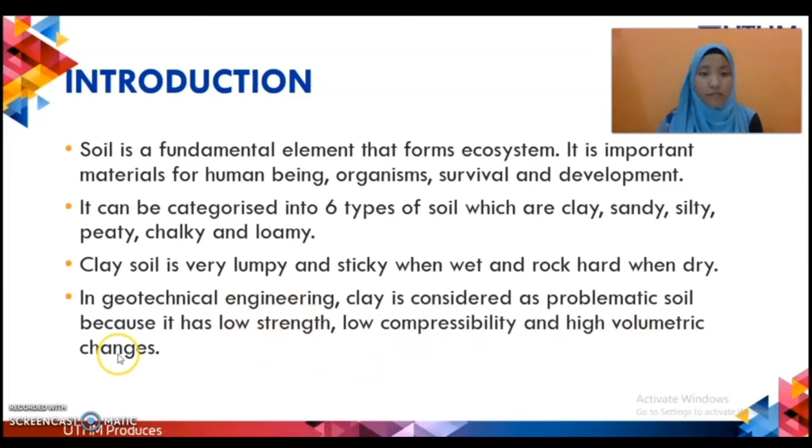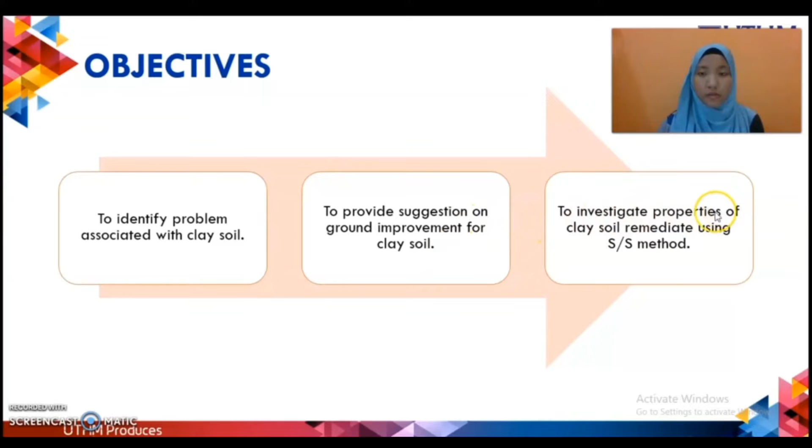Next, the objectives. The first is to identify problems associated with clay soil. The second is to provide suggestions on ground improvement for clay soil. And the last is to investigate properties of clay soil, remediated using the SS method.

Next, the problem statement, meaning what problems we want to address in this study. The first is what characteristics influence clay as a problematic soil. The second is what binder is used to remediate clay soil. The third is what properties of clay soil we focus on in this review. And the last is what properties of clay soil result when adding fly ash and OPC as a binder.

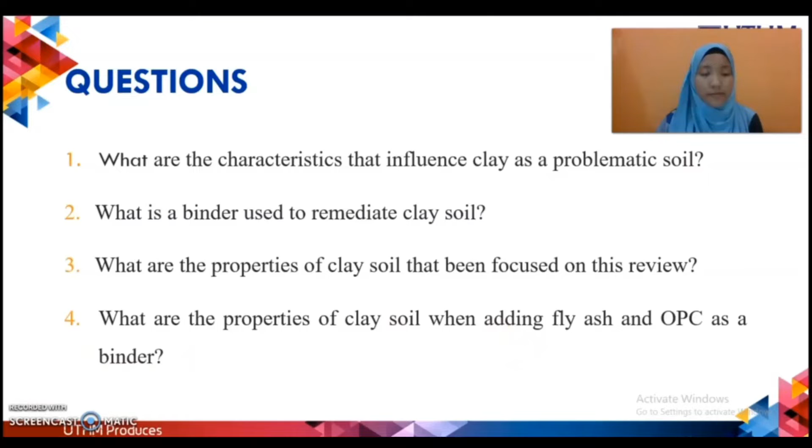Hypothesis: Clay soil is known as a problematic soil because one of its negative properties is low permeability, which causes large water holding capacity. So the amount of water is higher in clay. Based on this property, it clearly shows that clay is a problematic soil that needs to be improved, because when the amount of water is higher in clay, it will affect the strength of clay.

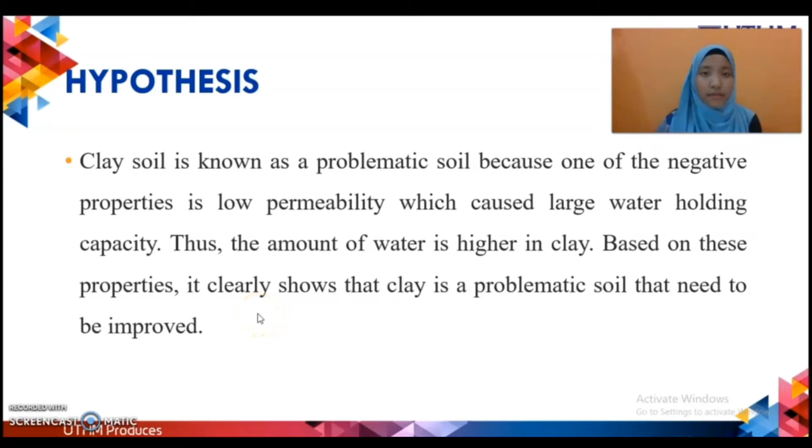Last but not least is the importance of the study. We need to study this because it can contribute knowledge about problematic soil, which is clay. We can also learn about the properties of clay soil, such as the Atterberg limit test, CBR test, and UCS test. These three are the main properties we focus on in this review.

The next point is suggestions on binders to improve clay strength, for example fly ash and also cement (OPC).

In civil engineering, it is important to investigate and study the condition of soil, because every building or structure built on the ground has to have a foundation. If the foundation is not stable due to weak or problematic soil, it might lead to damage in the future, whether to the structure itself or to people's safety.

That's all from me. The rest of the presentation will be continued by our group member.

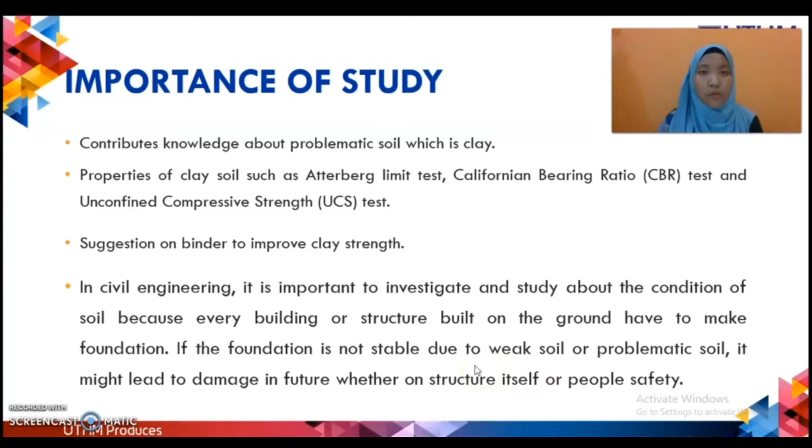First, soil strength. When examining soil behavior, soil strength is an important element to consider. The findings from sample sites and the procedure used to determine the physical qualities of the soil might be altered because these values are extremely difficult to quantify in the field.

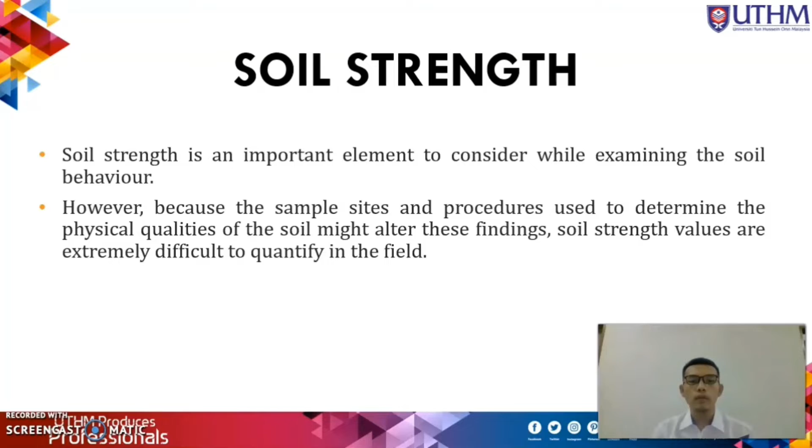Second, clay soil. Clay soil is nutrient dense and highly plastic soil that has varying firmness depending on moisture content level. It also has a fine texture and is impermeable, trapping water. The particles of clay are packed tightly at the structural level due to their tiny size. As a result, it becomes difficult for water to pass through because of the little space between particles. When clay soil is in wet condition, it has high moisture content, making it sticky and smooth to feel. When the moisture level is low, it becomes brittle and loses its plasticity qualities.

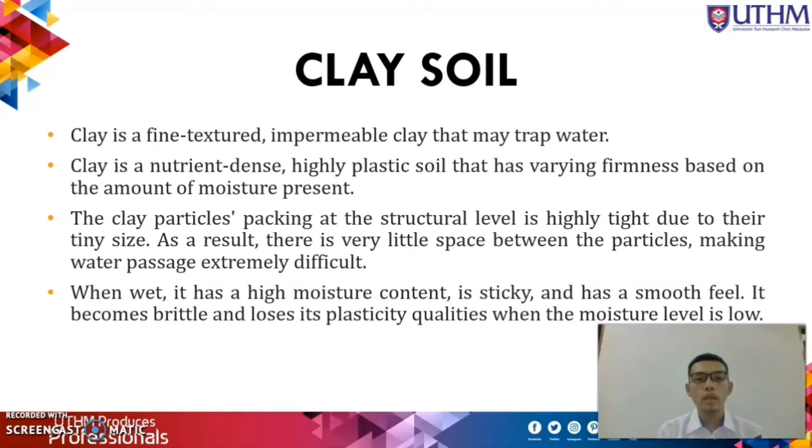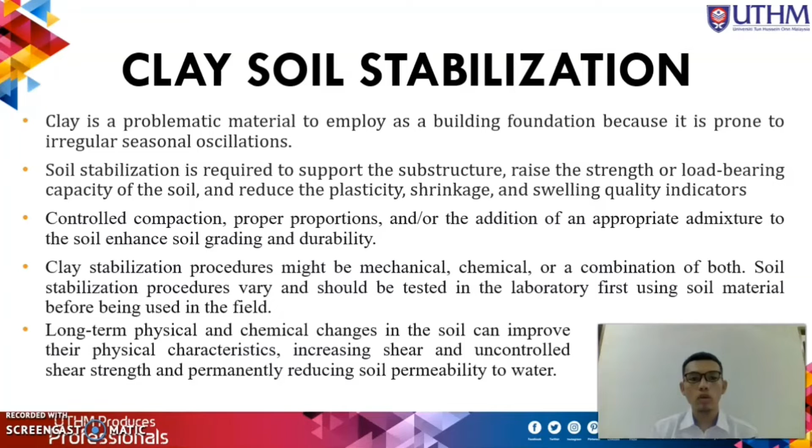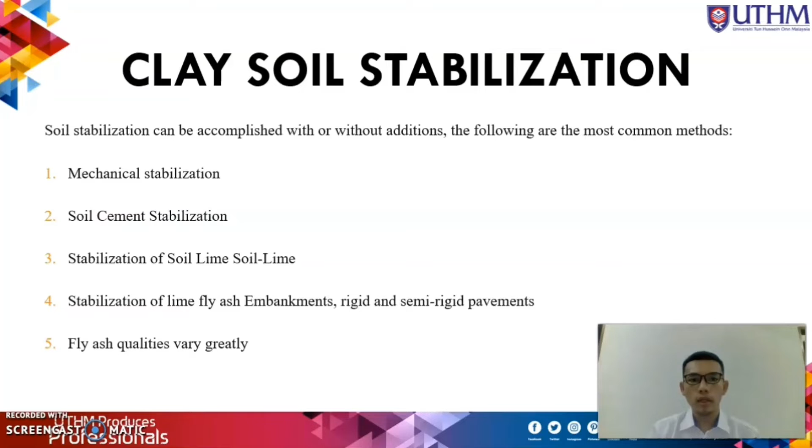Soil stabilization can be accomplished with or without addition. The following are the most common methods used in the field: first, mechanical stabilization; second, soil cement stabilization; third, lime stabilization; fourth, stabilization with lime and fly ash; and lastly, fly ash stabilization.

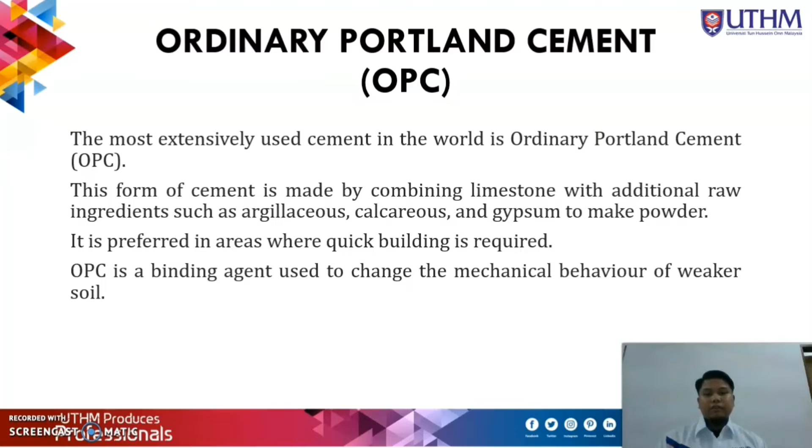Ordinary Portland cement, or OPC, is the most extensively used cement in the world. This form of cement is made by combining limestone with additional raw ingredients such as argillaceous, calcareous, and gypsum to make powder. It is preferred in areas where quick building is required. OPC is a binding agent used to change the mechanical behavior of weaker soil. It is also a hydraulic cement, meaning it sets and hardens by chemical interaction with water during the hydration process. The effect of cement concentration and curing time on stress-strain behavior and the unconfined compressive strength of sand was studied for various curing durations. Water content, cement content, porosity, and the volumetric cement ratio are the primary parameters that make up sand strength.

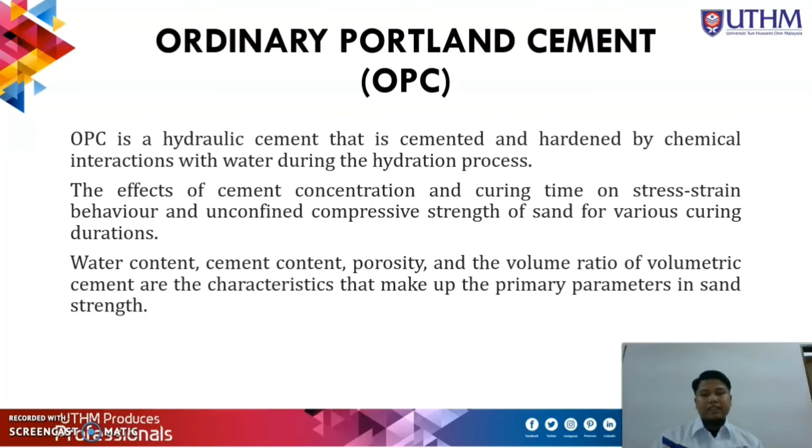Next, for the fly ash. Fly ash is a thin grey powder made up primarily of spherical, glassy particles that is a byproduct of coal-fired power plants. Pozzolanic qualities refer to the ability of fly ash to react with lime to generate cementitious compounds. It is ideal for soil strength or landfills. Fly ash is a combustion waste that consists of tiny particles that ascend with the flue gases. Bottom ash refers to the ash that does not rise. Fly ash is the ash created from the burning of coal in an industrial setting. The substance fly ash is heterogeneous. Fly ash increases the performance of concrete and soil, as well as providing several benefits in both cement and non-cement applications.

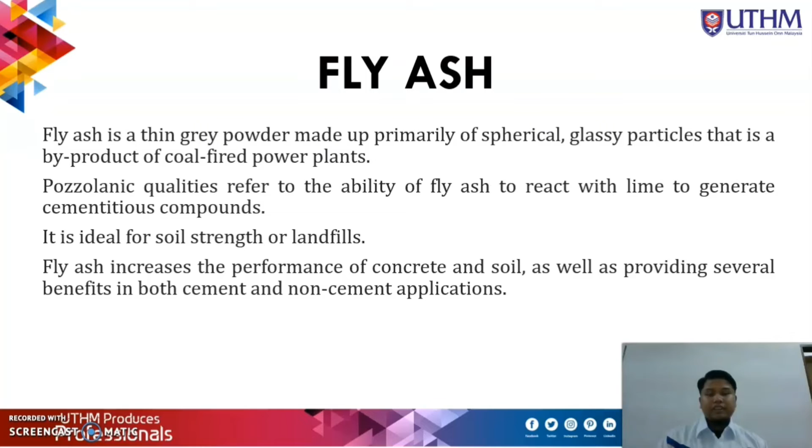The aim of the paper was to use waste materials and a secret binder component to increase the engineering quality of clay. Clay is a natural substance made up mostly of fine-grained minerals, composed of small particles with plastic and adhesive characteristics. Clay also has microscopic holes and pores which allow it to hold water. It has a tendency to expand and contract in this condition, which might lead to settlement. When exposed to a little amount of water, it softens and liquefies. Clay's low strength and stiffness make it difficult to deal with in construction. This has created substantial geotechnical engineering issues, since weak soil may collapse building foundations and produce road pavement cracks.

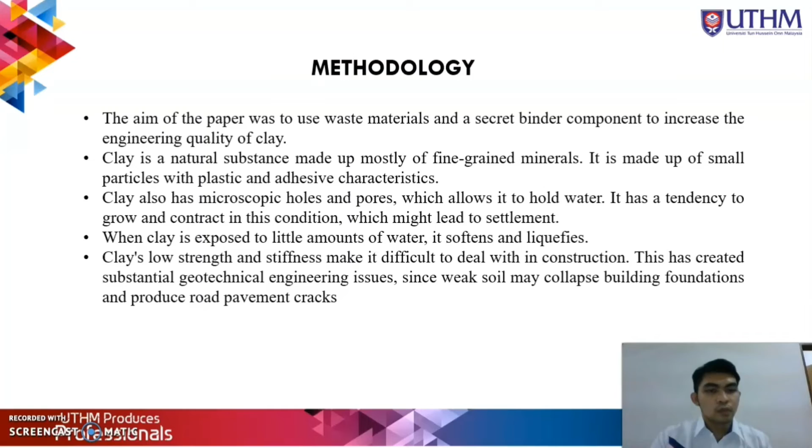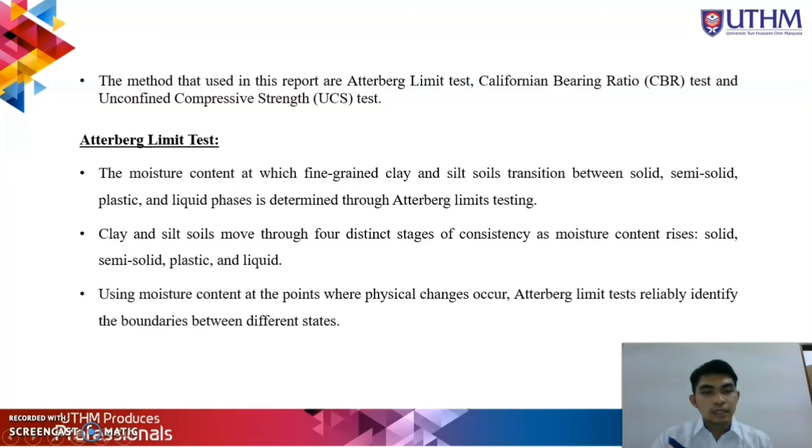The methods used in this report are the Atterberg limit test, the California Bearing Ratio (CBR) test, and the Unconfined Compressive Strength (UCS) test. The Atterberg limit test is used to find the moisture content at which fine-grained clay soil transitions between solid, semi-solid, plastic, and liquid phases. Clay and silty soil move through these four distinct stages of consistency as moisture content rises, and the Atterberg limit test reliably identifies the boundaries between these different stages.

The CBR test is used to assess the strength of soil subgrade and base course material. CBR test values are used by those who plan and engineer roads, airport runways and taxiways, parking lots, and other pavements to determine pavement and foundation thickness. A research by Kunle E. Ogundipe and Kehinde O. Oyesemi in 2014 showed that utilizing an earth-safe material known as periwinkle shell powder could help identify normal moisture content, liquid limit, and plasticity index. The tests were performed on lateritic soil to improve its stability. Their review showed that periwinkle shell powder could be considered a decent stabilizer for clayey or laterite soil, and its use as a stabilizer could also help reduce the contamination caused by its unpredictable dumping.

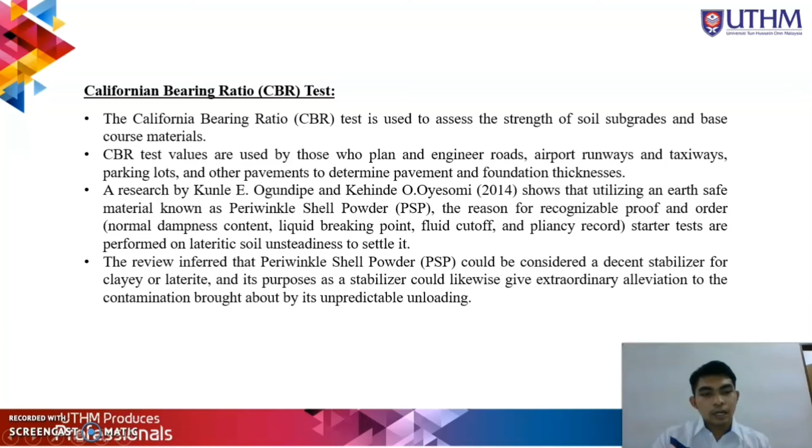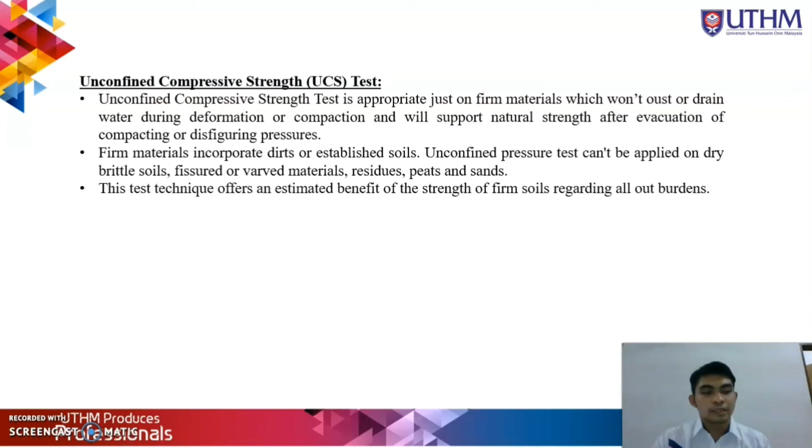First, both the liquid limit and the plasticity index decreased when the amount of fly ash added to the clay soil increased. These results were obtained from the Atterberg limit test conducted to find the best ratio for the clay and fly ash mixture. Second, as the curing period extended, the unconfined compressive value of the mixture increased, as obtained from the UCS test. It can be concluded that the effectiveness of the material discussed, fly ash, has been proven to stabilize clay soil and improve soil strength.